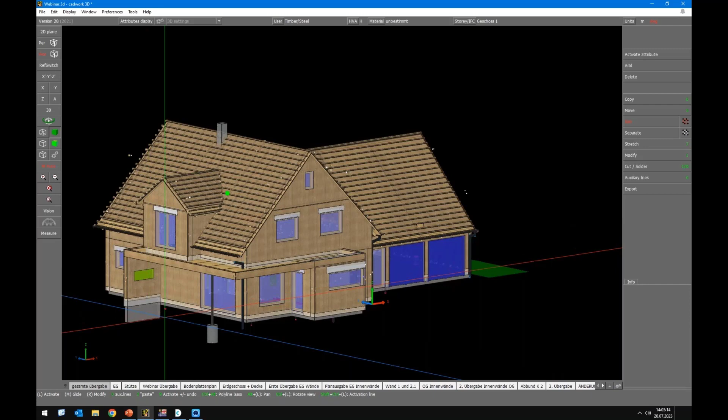To get an overview, I show you the model in cadwork. This is a single family house, let's check the basement here. It's made of timber frame walls, and here we see the floor - the bearing beams and floor beams or ceiling beams. As you can see, the ceiling beams as well as on the real image, they are supported on these bearing beams here, on the down beams, but the architect or building constructor wants to have the bottom edge of the beams on the same level.

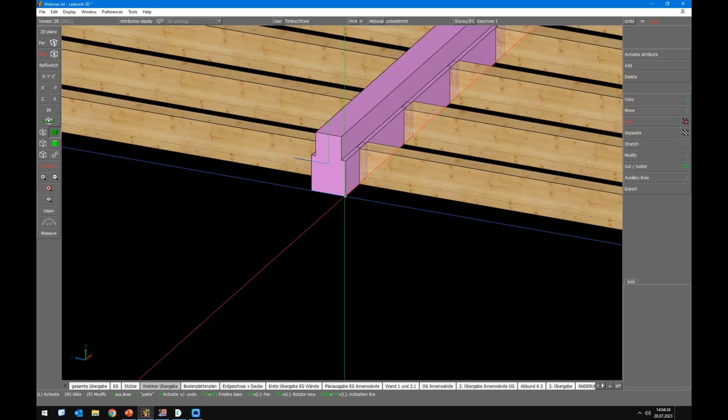So it was decided to lift the beam a bit, you can see it here. The ceiling beams are connected via dovetail connection, and the bearing beam will be a bit inside the ceiling structure. Otherwise, we would get too little stiffness. It was decided to lift this a bit up - maybe not so good for acoustic reasons, but the building constructor decided to have bottom to bottom for floor and bearing beam here, for this downstand beam or flush beam, however you call it.

You can export the file via the IFC interface, for example, or via the DXF interface. We will also be able to export it the old way, what we had in RFEM 5, via the DSTV interface. This will be available soon.

But because of time reasons, I will not show you the import or export today. I start directly with a finished model. If you are interested in the import export via the IFC interface, maybe it's worth watching the German webinar which was done on Tuesday, but because of time I decided to skip this part in the English one. Even when you don't understand the language, you will understand the pictures and how it is done.

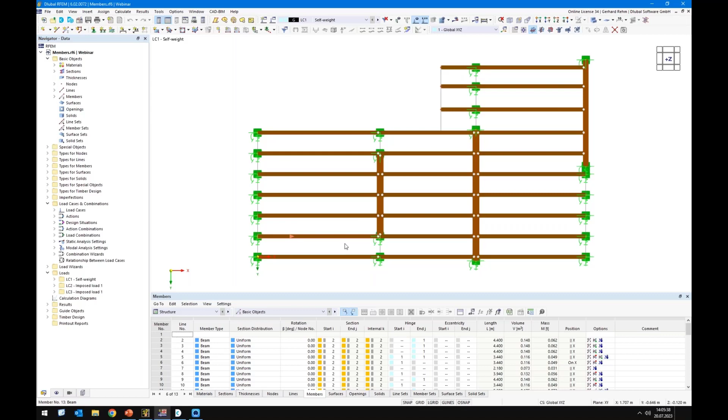So we have imported all members already, and I have assigned the hinges. So we have 3 one-span beams. We have here our bearing beams.

We have here the staircase. So maybe let's go back here. So there's the staircase here. And that's why we have this cantilevers here. And yeah, actually we have everything finished.

I decided to create just one support with a few springs to avoid that the beam rotates around their own axis. So yeah, it keeps it simple.

Okay, so I will switch to the top view. And I have created already 3 load cases. So load case 1, load case 2, load case 3. And we will apply the loads right now.

So there are 2 ways, or actually 3 ways, to apply the loads here on these floor beams or on the ceiling beams. The first one is the manual member load. The second one is the member load from an area load. And this is what I show you today. We will not use it. I will delete it afterwards, but there's a new feature inside and I want to show it to you.

Okay, we apply here 2.5 kilonewton and I will select the geometry by picking these nodes. And we simply click OK.

Maybe let's start with this view. So this is our area load. And when we display it separately, we will see how the loads are distributed to the beams.

Yeah, so let's focus, for example, on this node here. You can see there is this linear distribution and there's this node load. And sometimes it was hard to understand how the distribution works, or from this tributary area, these loads come from.

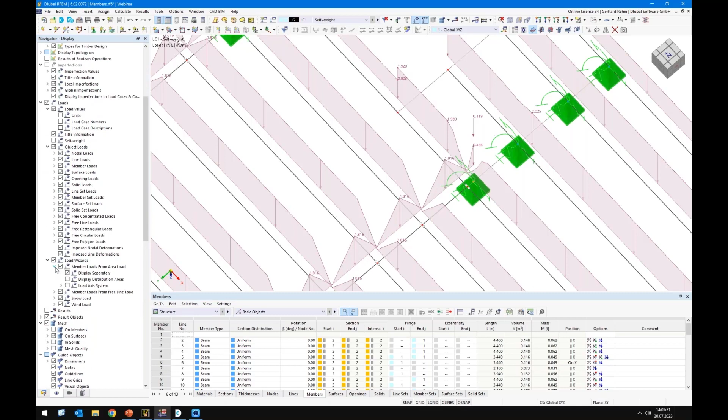And here in the display navigator under load wizard, you will find this option now to display the distribution areas. So when you activate it, I will deactivate the nodal supports here for a better overview.

And when you select the node, you will get these colors here. And now you can perfectly see the tributary area. And you see, okay, perfect. This nodal load or this nodal force comes from this area.

So in the background, or actually you see now these Voronoi cells, which are used here for this approach. Yeah, and this, I guess, is really handy because of a better overview and the understanding of the approach.

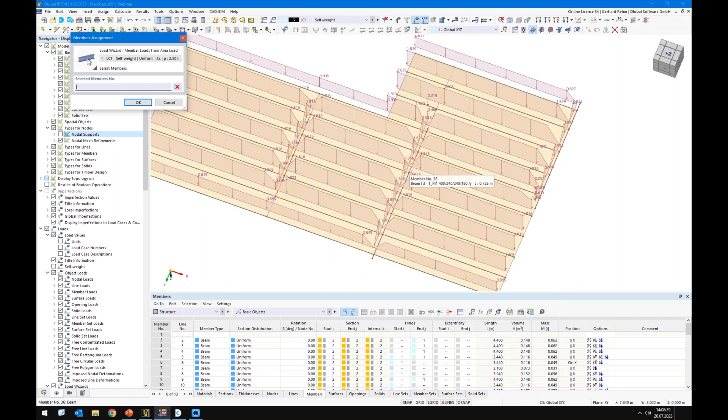Yeah, of course, if I go to the load again and say, please remove all beams which are parallel to the bearing beams, then we get our typical distribution, what I want to use here now. Yeah, and also the Voronoi cells.

Okay, but as I mentioned, we don't want to use it here. That's why I delete it. Because we want to use the surface, the load transfer surface.

Means we will create a new surface by selecting boundary lines. And the stiffness type I will switch over to load transfer. So now I need to select all these lines, these boundary lines.

Okay, let's have a look on the local axis system. Here we go. Reverse local axis system. Yeah, I want to have it downwards. I was a bit confused.

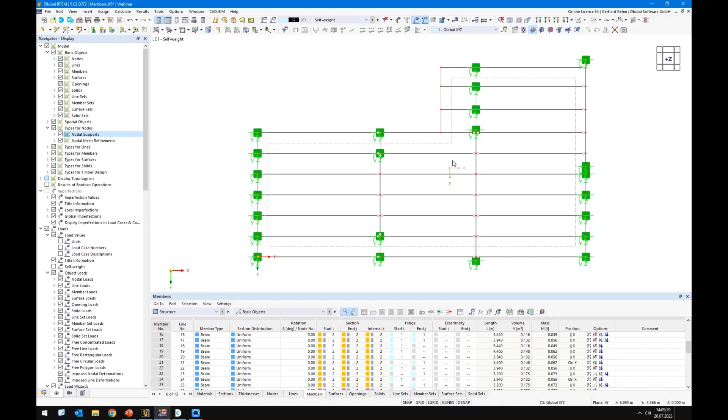Okay, yeah, we see, okay, the local y-axis goes parallel to the global y-axis, means perpendicular to the ceiling beams. And yeah, that's why I will switch over now in the load transfer to Y direction. I want to distribute it via the Y direction to all members.

And as we can see here, we have nodes which will be also loaded. And these nodes are located exactly here on this location and this location, same as we had before in this load wizard.

That's why I don't want to use it. I copied these numbers and insert it directly here. Otherwise, we would get small nodes here, small node loads on these locations, and I want to avoid it.

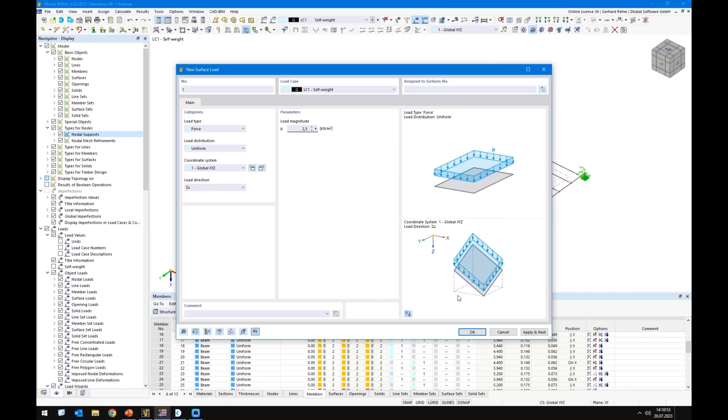Okay, we can switch off again the local axis system. And now let's load it. We will apply a self-weight, additional self-weight of 2.5 kilonewton per square meter. That's from the ceiling structure.

And when we right-click the surface, we can display it also separately, same like for the load wizard. Okay, that's actually exactly what I want to see.

But when we remember there was the staircase here, and on the left and on the right side, of course, we consider only 50% of the load because the surface is only modeled until this location. Of course, I can extend the surface by another 50% of the spacing, but in this case, I show you some other new function called load distribution factor.

I activate these factors, and now I can assign to this member and also to this member, please consider the load by factor 2.

And now when we check it, it's 0.9. When I hit the OK button, it becomes 1.8 again. Okay, that's self-weight. Let's switch over to imposed load.

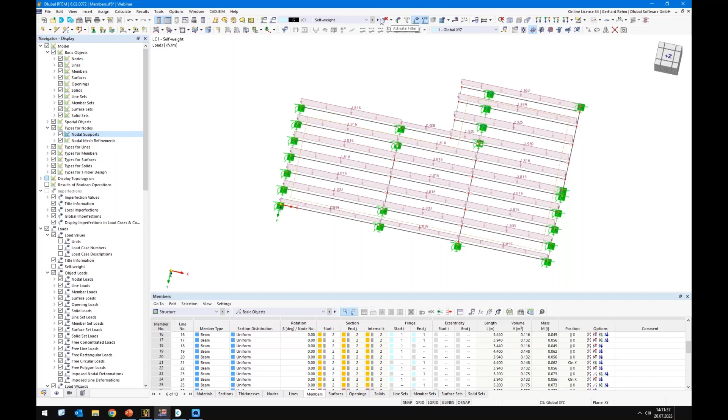Here, I want to consider it per span because afterwards we want to check continuous floor. Here we have 3 times a one-span beam, and afterwards it will be a continuous beam. That's why I directly load it with load case 2 on the first and third span, and load case 3 in this case is for the intermediate span.

In this case I cannot use surface load, of course, because the surface is not divided here on these lines, but I can use free loads, in this case free rectangular loads. So it's for surface 1. I select the area from here to here. I click apply next. Of course, we need a magnitude, in this case 2 kilonewton per square meter.

And again, for the third span, to zoom in a bit, here we go, and click OK. And we will see the distributed loads.

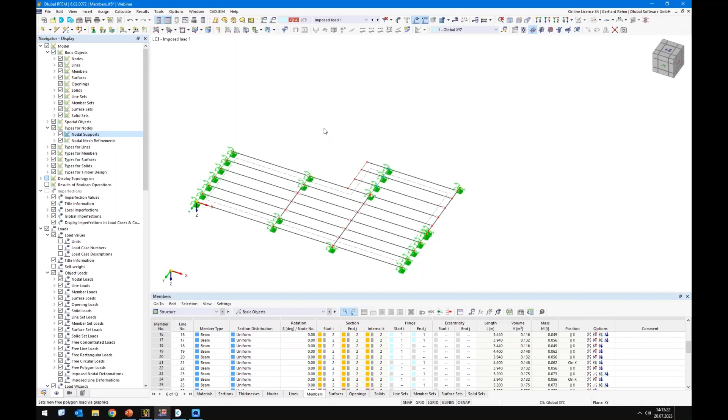Switch over to load case 3, and in this case we have this corner, so we cannot use the rectangle load. We will use the free polygon load. I will select here the corners. Also 2 kilonewton per square meter on surface 1. And that's it.

So before we start designing the floor, we will check, for plausibility reasons, if everything is correct. I run the analysis now only for self-weight 1, and let's check the deformation, moment distributions, and so on.

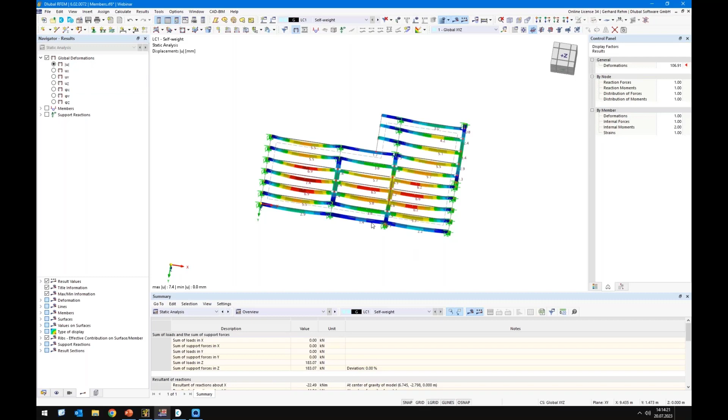I'm not interested in the nodal and support reactions. Let's check the deformations first. Maybe colored, it doesn't matter. So it looks good, and this is exactly what I expect.

Let's switch over to internal forces. We should have no normal forces inside, no shear forces in Y direction, of course in Z direction. That makes sense. And no torsional moments, that's also good. Bending moments look like for every one-span beam, that's okay. Here we have our hogging moment, which is also fine on this cantilever. Looks good so far, and now we can start to think about the design.

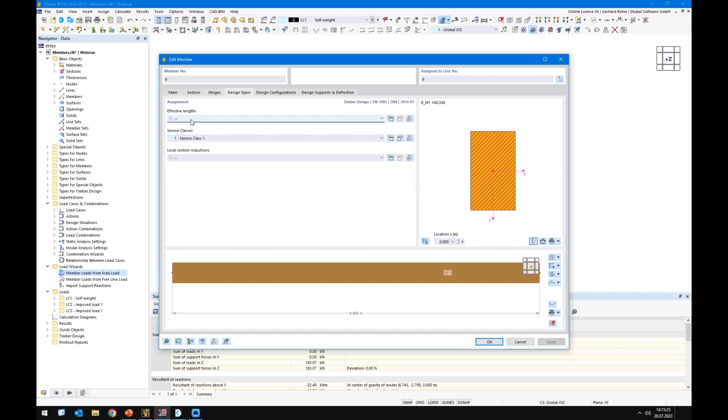Let's check, for example, this floor beam first. So when we come to design, we need to think about stability. Is there any problem with stability? For this floor, of course not. We have no normal forces. We have really non-slender cross sections, so lateral torsional buckling is also not a big deal here.

That's why I go to the ultimate config, which is assigned to all members, and I will switch here to do not perform stability analysis. Then I can get rid of the buckling lengths. For serviceability, it detects the reference lengths like for the member length. In this case, 4.40 m, which is okay.

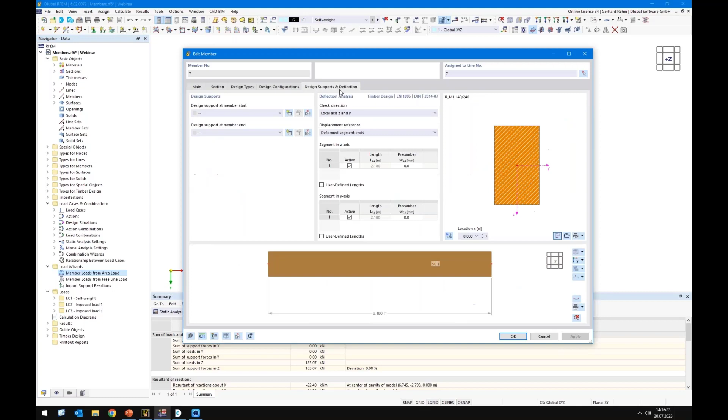So that means I don't have to do anything for the floor beams, but for the downstand beams and also for these beams here and for the cantilever, because right now, if I would design it as a member for this beam here, I would get a reference length of 2.18 m, which of course is not what we want. We should use a reference length for the SLS design of, in this case, 3.44 m.

We do this by combining these two members using a member set. I want to overtake the design properties, so the design properties are not on the member anymore, they are now on the member set. And when we check the design and deflection tab, we will see now we get a reference length of 3.44 m, which is okay.

So we will additionally create member sets for the downstand beams. In this case, I will create 3 member sets, and for this member set and this member set, we will do exactly the same. We activate the design properties. We have a reference length of 2.90 m for one member set and 3.33 m for the other one.

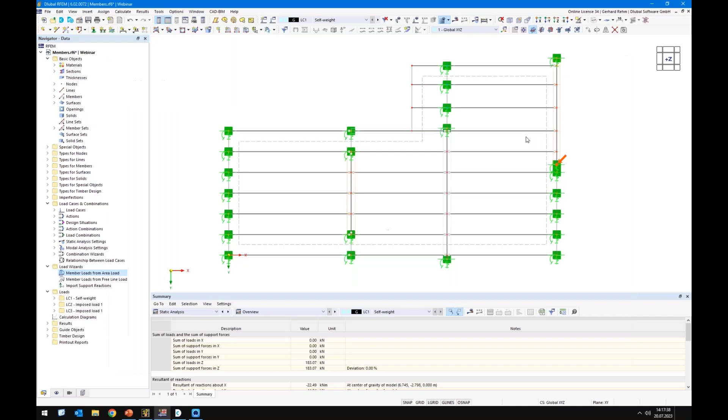Let's have a look at this beam here. Here, of course, we get really high load, and that's why I also add some design supports. So the reference length is still okay for the serviceability check, but I want to check the bearing area. That means I want to check the compression perpendicular to the grain, so that's why we need to create a design support.

So design length is 200 millimeters. And in this case, it's not an inner support, it's an edge support. And the KC90 factor needs to be selected here. In this case, for glulam, I select 1.75.

And that's it actually, but I want to mention these two new options, shear reduction and reinforced elements. So the first one is ignoring the shear force in a distance from the support edge, in a distance of member height from the support edge. That means we will use the relevant shear force for the design.

So this is nothing else than we have really high compression perpendicular to the grain inside. That means it increases our shear strength. And that's why it's okay to use, of course, only when the load comes on from the top side. In this case, I cannot use it because the load comes actually from the bottom side. But if the load comes from the top side, it causes some compression perpendicular inside the beam, and this will help to increase the shear strength.

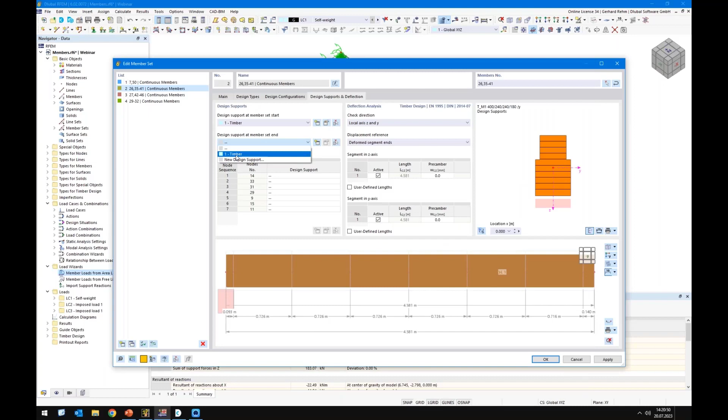Okay, oh, I need to create it, of course. So 200 millimeters and 175, and also at the other side. Okay, that's it.

We need to do the same for the cantilevers here.

So when we check the lengths, the reference lengths, it would be considered with 5.20 meters from member start through member end. Of course, this is not the wished behavior. We want to check this here with a reference length for cantilevers and this for beams.

So in this case, we need to create segments, and segments can be created by using some design supports. In this case, I don't want to check compression perpendicular to the grain. That's why I'll switch from direct support to indirect support, meaning I will switch off the direct support option here.

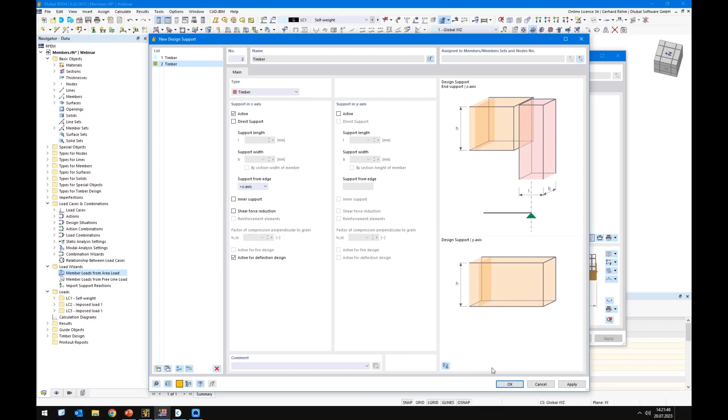Then no design is done for compression perpendicular to the grain, and it detects here this tiny node, and I want to apply it to the intermediate node also, of course, not at member set start or member start.

Yeah, and now we will see when we check, for example, only the z direction, there's one segment for the cantilever with 1.26 and another segment with 3.94 meters. And these reference lengths are used for the design. And since there is no support here, the program automatically detects that this must be a cantilever.

Okay, good. I think so far that's it. We can run the analysis. Oh, yeah, that was the wrong button. I clicked analysis for load case 1 only and not for all.

Oh, maybe it's good to see this, I want to explain something more about the timber design. So we will switch to our timber design. We want to check ULS and SLS. In this case, I guess I have chosen the German annex.

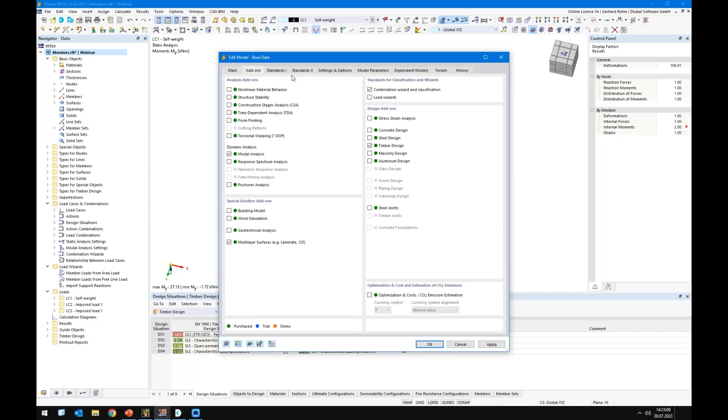I'm not 100% sure now, that's why I check it again. Yeah, it's the German annex, but of course, you can select your annex according to your country.

Okay, so in this case, we check ULS, SLS. We have characteristic, quasi-permanent, and a mixture of characteristic, deformation, and the creep parts of the quasi-permanent one.

Objects to design: okay, all member sets and all members, but you see we will get some invalid members. When we select it, we will directly see the invalid members are members without design properties, because the design property is here in the member set.

So to get rid of any warning message at the end of the calculation, I insert here only the list of all members, here of all member sets, and of course the surface, which is a load transfer surface, cannot be designed. That's why I switched it off here as well.

Materials, okay, it was taken over here, GL24 for the glulam beams and C24 for the ceiling beams. Okay, when we go to sections, we should think about the sections here.

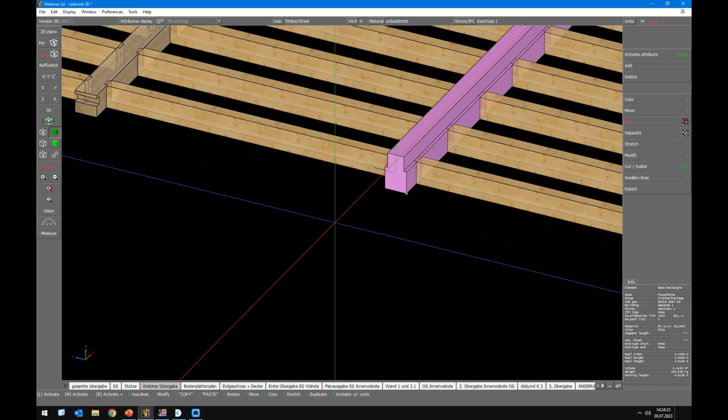Here, this is this inverse T-beam. And when we check it in the model, I create a visibility. I also use this inverse T-beam here. But when we think about the connection, we have these notches here coming from the dovetails.

In this case, it's better to not consider it for the ULS design. For SLS, it's not a big deal because it is reducing the stiffness, but it's not worth talking about because the influence is so small. But for ULS, of course, the influence is big.

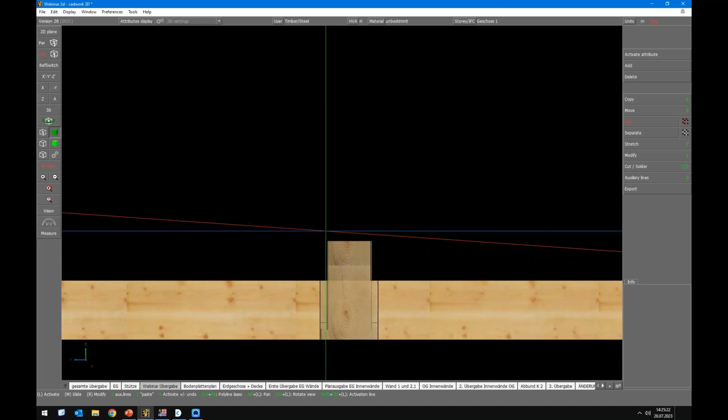And in this case, we need to reduce it, and that's why I will directly use here a rectangle section, which is 180 by 400. This is from here, from this to this edge.

And this we can directly use here by using the option 'use other section for design'. So for the left side, it was this one, 24 by 24. And this one is, I guess, 180 millimeter on the top side. Yeah, 180. Okay, so we click here and then we will replace the 240, the width, with 180.

And here I will also use 180 by 400. Okay, and now we have considered the notches as well, and we can be sure that the ULS check is correct.

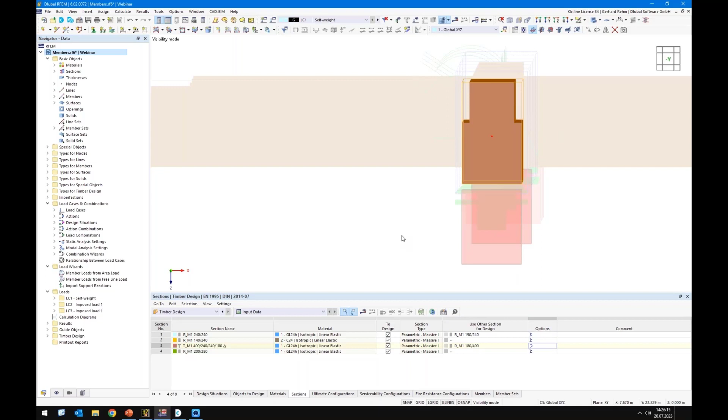Okay, then let's start the ULS check and the SLS check, of course.

Okay, we get the results for our load combinations. Let's cancel the view, and...

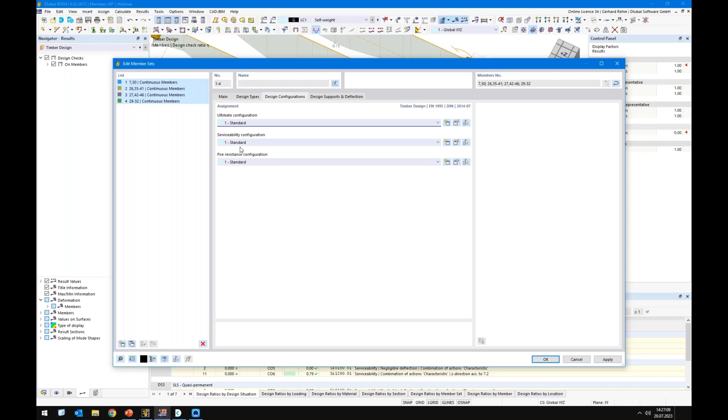Now we see, oh, maybe I forgot something. Wait a minute, please. I forgot to assign a config to the member sets. Of course, member sets should have also a ULS config. Otherwise, only a serviceability design check is done, and this is what we don't want to do.

All right, so sorry, I need to run the timber analysis again. Of course, not the internal forces, but the timber analysis.

Okay, and we see here our ratio graphically. We see here on the bottom in the table directly, okay, there is one beam which causes some problems.

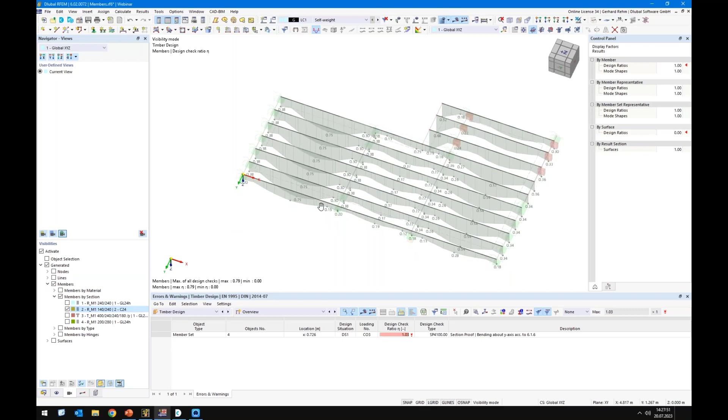Maybe let's start with the ceiling beams. Okay, so we will get the maximum ratio, let's focus on this span here, of 75%. We can check it here separately for ULS, which is around 60% ratio, and for SLS, it's around 75%.

Okay, that's what I expect. When you see the ratio here, the ratio is affine to the deformation, especially here on the cantilever, you see directly the ratio affine to the deformation. So we can confirm that everything is defined correctly.

All right, maybe let's go to the next object. In this case, let's check this T-beam here in -x direction. Okay, and what we see here is a ratio with some jumps.

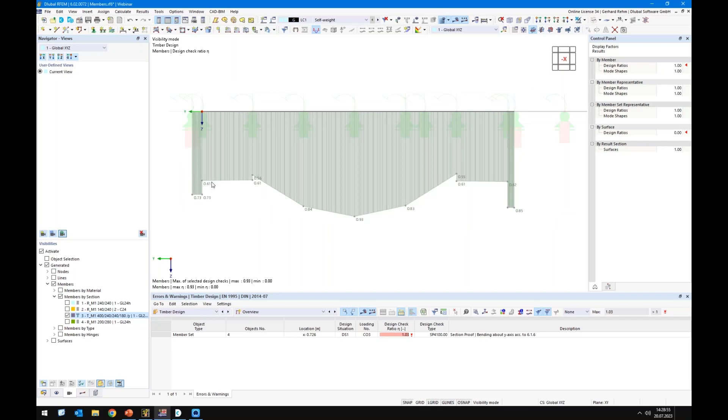Yeah, of course, the first part from here to here, shear is governing, and from this point to this point, deformation or bending, and here shear again. But if I'm interested in more detail, I can also switch off here SLS and all checks.

And I can check it separately. So for example, I want to check only bending, and I get the ratio only for bending, or only for shear, it's affine to the shear force distribution. So I also get the ratio at only one X location because of the support bearing resistance.

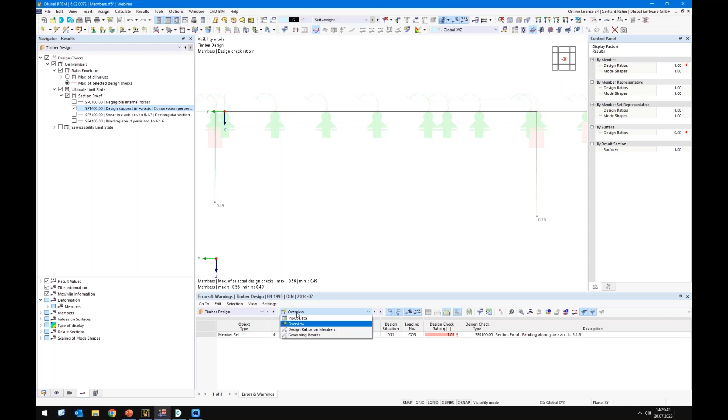So when we switch to the input, and we switch to the design ratio on members, we can see, okay, we have compression perpendicular to the grain.

Maybe let's open this design check. And here you can see what is done. You see the whole equation, the whole stuff from the code. We have our support length of 200 millimeter extended by another 30 millimeters. So you can follow every value in detail, or every intermediate value, which helps you to prove your calculation.

Okay, additionally, if you are interested, maybe we can do it in the ULS.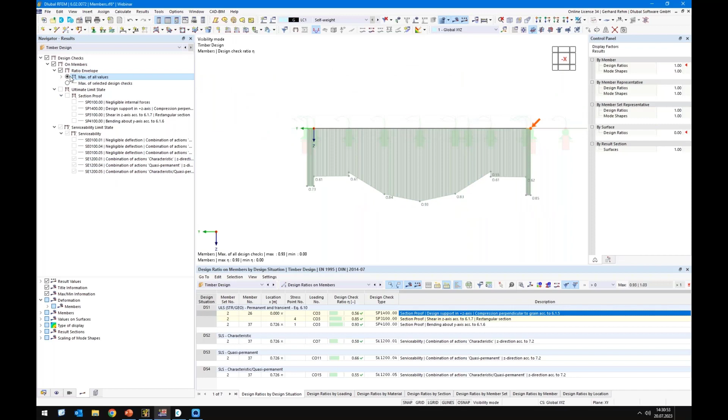You have the option to deactivate the ratio envelope, and then you will get 3 different ratios overlapping each other. The first one is design 1200/01, 04, 05, and here you can see which ratio it is from which combination. Okay, let's activate again the max of all design checks, so the envelope.

We can see here we have a small issue because of bending, but especially on this location, we know it's a small glulam beam with 240 by 240. And when we know that the reference strength of the EN 14080, the glulam standard, is giving us the strength for a reference height of 600 millimeters, so we are far away. That means we can use our KH factor, our size factor, which can be considered here in the ULS config.

Here you can activate this KH factor according to Eurocode 5, chapter 3.3. And now we can increase the strength up to 10%, so 24 by 1.1 in this case, because the beam is so small.

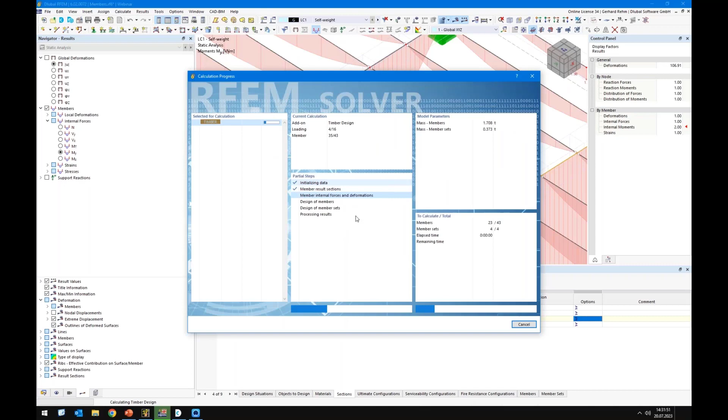Okay, now we get a ratio of only 94%, which comes from bending. Let's have a look inside. Okay, and we will see here, this is the KH factor, and 1.1 by 24 equals 26.4. So actually we have proved the floor, so it's okay according to ULS and deformation.

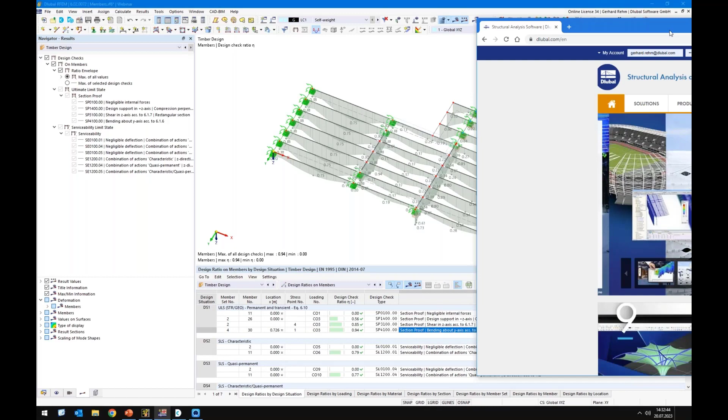Of course, for floors we need to check vibration. That's a big topic, maybe leading or controlling. So for this floor, maybe when we have time at the end, I will show you the vibration design check. If we don't have time, I will refer to our website.

And here on the website, under Support and Learning, you will find videos. Here, videos, you can search for vibration. And when you scroll down, you see this video here, and here I show you in detail how you can proceed with the vibration check.

So maybe let's see what about the time at the end, and then maybe I can show you something as well. If not, I refer to this video.

Okay, let's say vibration design is fulfilled, and we call the carpenter, for example, and give them the cross sections. On the next day, they call again. Okay, the architect or the building contractor called us, and they want to have maybe not a wooden beam ceiling, maybe they want to have a glulam ceiling, or they want to have a cross-laminated timber ceiling. That means for us, okay, we have to redo the whole stuff, but of course we want to spend as little time as possible. And how can we proceed in this case?

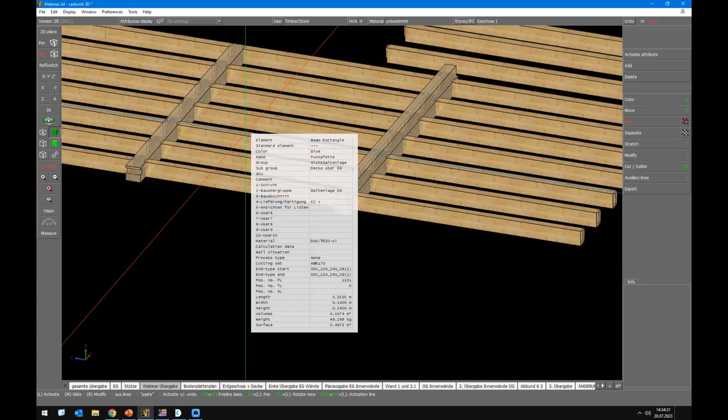So let's think about glulam floors or cross-laminated timber floors. Of course, it would be too uneconomic in this case using one-span beams here. So that means in this case we have to use real downstand beams, which are underneath the beams. In this case we need to think about the cross-section height, especially since we don't have so much height in the floor. So when we have at least, let's say 2.50 meters, and the downstand beam already has 400, then only 2.10 meters are left, and of course this is less. So in this case we need to keep the downstand beams as small as possible.

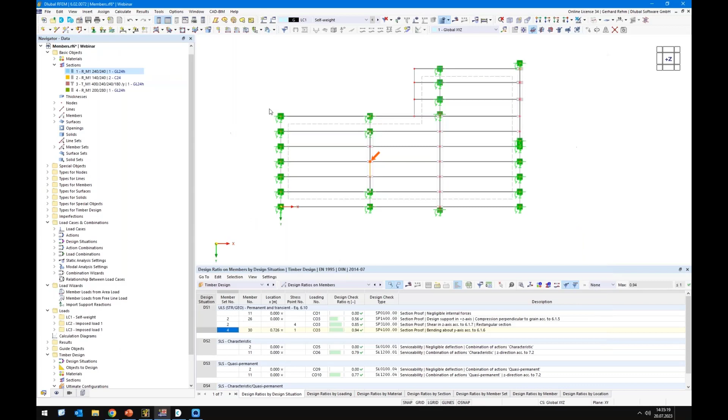So in this case, I want to replace these beams here by, in this case, also timber beams. Of course, you can use steel I-beams as well, that's also possible, but I replace my sections here. Let's start with the left one, 24 by 24. Or let's start with the right one. And here I want to replace it, let's say, by 200 by 360.

And now we come to also a relatively new feature, about LVL design. So now we are able to design also LVL materials. I guess the most famous producers are listed here: Pollmeier with Baubuche, Kerto, Steico, Stora Enso.

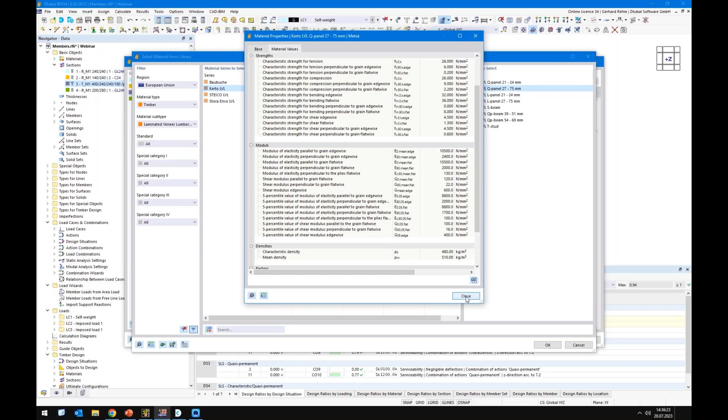And the advantage is it's not only for beams, it's also prepared for surface design. So we can select Kerto Q-panel, because all values are available for this material. You can see all values for stiffness and also for the strengths are available, and we can do a full design. In this case, we select the Baubuche GL75 beam and we click OK.

And now we have to think about, okay, what about the lamellas? Are the lamellas orientated flatwise or edgewise now? So let's go back to the material again. And here we see we use an isotropic linear elastic material model. In this case, we use a flatwise orientation of the lamellas.

This is flatwise. Of course, if we want to use it edgewise, we can flip the member by 90 degrees. This would be an option.

But much better now, we have new material models in RFEM 6 called isotropic timber or orthotropic timber. When we select isotropic timber and switch to the next tab, we can switch between parallel and perpendicular, flatwise and edgewise. For Baubuche, there's not much big difference, only the shear modulus will change when I switch to edgewise. But when we think about OSB materials, for example, they have different stiffness in different directions.

That's actually why this material model was made for. In the past, with RFEM5, we had to decide if the material is wall stressed or plate stressed. Now we can have everything within one material model. Here you can see we have wall stress E-moduluses in both directions and plate stress E-modulus in both directions. The glulam beam or Baubuche GL75 beam can be used only as a beam, we cannot use it in perpendicular direction, that's why we have 0 values here.

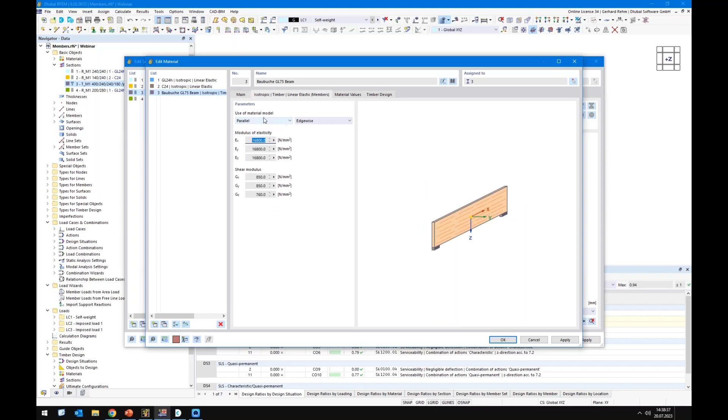Let's switch this back to isotropic timber, in this case parallel and flatwise. We will do the same for cross section number 1, and switch over the material to Baubuche.

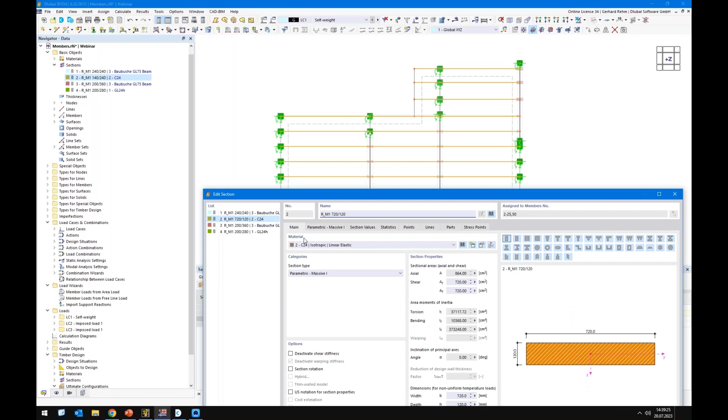The floor beams, of course, need to be changed as well. For a glulam ceiling, normally we have elements like 60 or 62 centimeters. In this case, the distance is around 72 centimeters. So for simplification, I switch the beam width to 720 millimeters and the height to 120 millimeters, and switch to GL24. Don't worry about the orientation of the lamellas here, this is just a graphical issue.

When we switch on the rendering, we see the width fits nearly perfectly here, maybe not here. The load transfer surface is visible as well, but it's a small error, not relevant to mention.

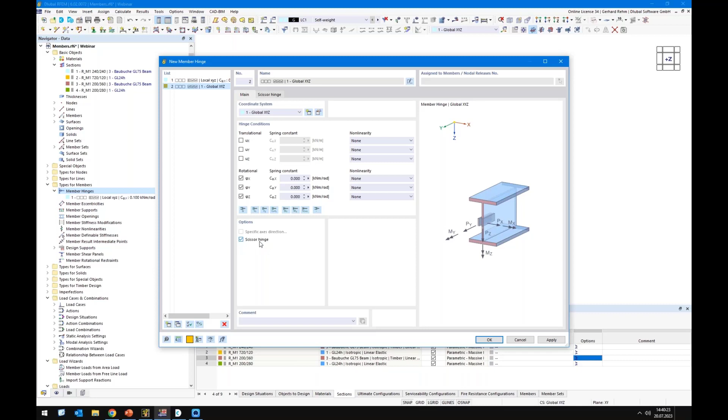The continuous effect is a topic, so in this case we will create a new member end hinge, a so-called scissor hinge for all degrees of freedom, or for all rotational degrees of freedom. This scissor option causes the effect that no moments are transferred to our downstand beams.

Now I select the option assign to members graphically, and select it on the right side, here on the left side, and this one, and on the right side. We select OK, and now we have assigned this member hinge to the continuous members.

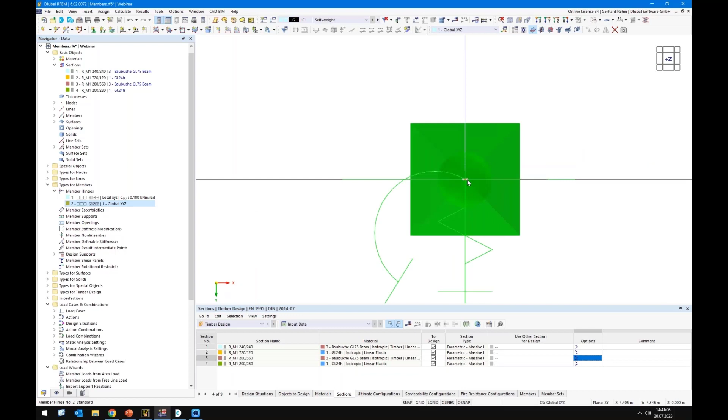Here we have no additional member, we don't need it. Wait, yeah, we can delete it because it's a continuous beam. I will switch off the nodal supports and select the hinge and delete it manually.

Also here on the bottom we don't need hinges. No, I don't want to select the member, the hinge. And here it seems I have forgotten the hinge on member start.

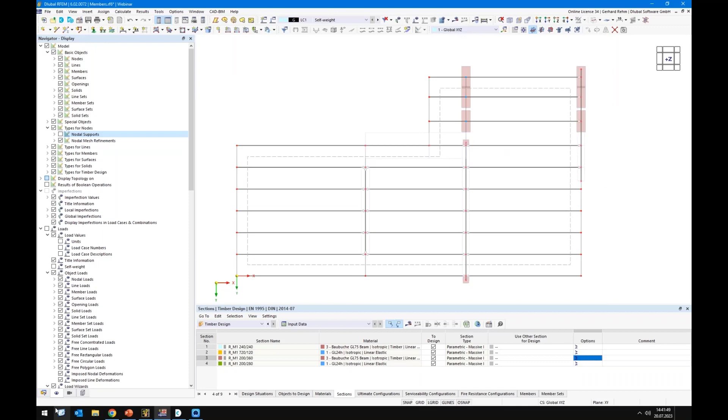Looks good, looks good. Let's double check it again, checking all the yellow colors. Okay, looks good so far, so that's it actually, we have to find everything.

So we can run the calculation again. That's the easiest way to switch from a floor beam, actually from a wooden beam ceiling, to a glulam ceiling.

Of course we need to recalculate the internal forces, and then we design the members. So let's check, in this case, the cantilever, because of the high load here, will be deformed upwards, and that's why we get this ratio.

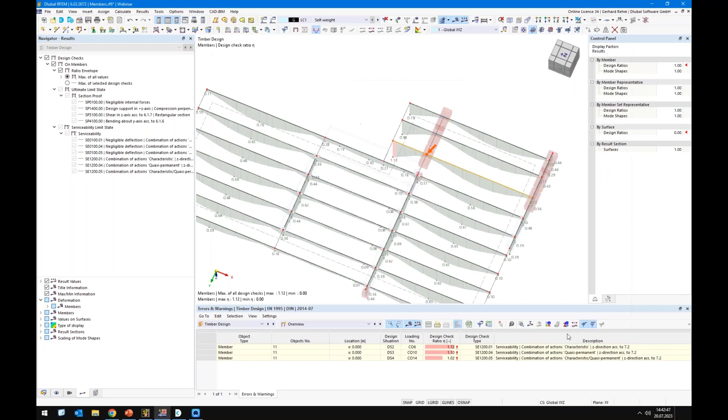In this case, I'm not interested in this ratio. You can deactivate the design check here by setting this checkbox to inactive. All right, but we don't care about that, let's check.

We have, for the glulam, a ULS check of around 36% ratio, and for SLS we have around 70%, 68, 69%.

Let's check also our glulam beams, or our Baubuche beams, sorry, it was section number 1 and 3. So we have ratio for SLS of 69 and 62, and ULS, yeah, extremely small.

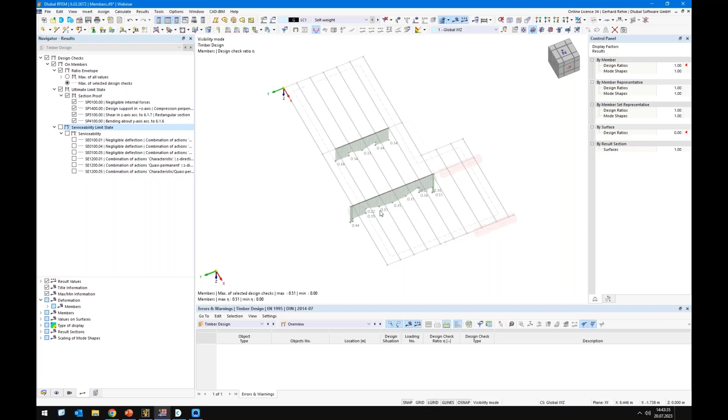So maybe worth changing it to 320 millimeters. Now we have 200 by 360. Then we can change it to 320, but that's okay for now. Okay, so we remember the ratio.

It was around 38 for ULS and 68 for SLS. Okay, but of course, in case you come from scratch, you don't want to model this maybe as a girder. Maybe you want to model it directly with surfaces, and this is also possible.

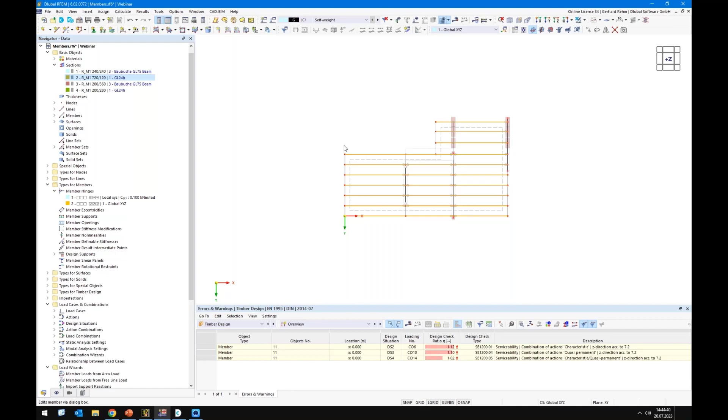In this case, we will select our members, our floor members, or maybe we can only hit this button and right click the member, because we don't need it, because I want to consider now the stiffness via a surface. So that's why I go to edit, and I will switch the beam type now to result beam.

So this result beam will not bring us additional stiffness. It considers only, or actually the result beam is just integrating the results from the surface. Not only the internal forces, but also the deformation. So I create a result beam really small with a small integration area of 1 millimeter, because to have the deformation that's clear, I need a width, to get something integrated. Okay, that's all.

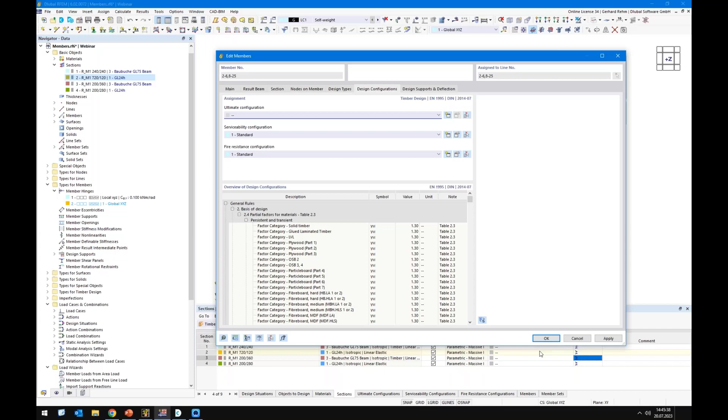All right, then we should focus on that these beams should not have any ULS config, because we don't want to check it against ULS. We want to check it against SLS in this case, because the ULS check will be done by the surface. And the reason why I did this, I will explain in a few seconds.

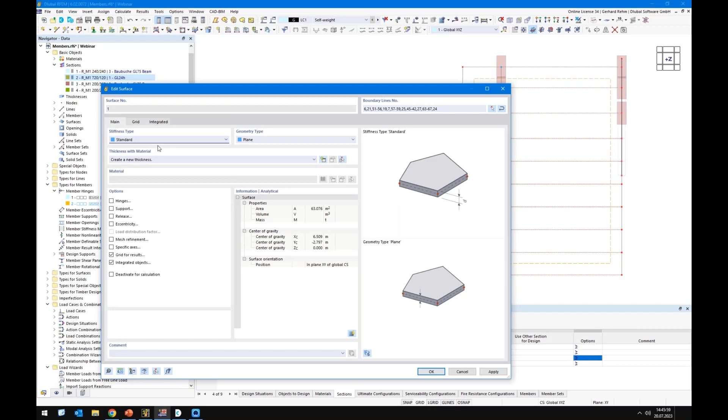And for the surface, I will switch this to standard. And here we create a new thickness. This thickness will be 120 millimeters. And the material is GL24, that's correct, but an isotropic material model, which we cannot use for timber, for surfaces and solids. So we create a new one.

So I will copy this material number 1, and now I will switch to orthotropic linear elastic, but I can also switch to orthotropic timber. So in case of glulam and softwood, it does not matter which one you use, because it's the same. So when we switch to orthotropic, you will see we will get the same E modulus for plate and wall stress. So that's why we can also use this one here.

Okay, we see here we have the E modulus in X direction and in Y direction, which is EX divided by 30. Okay, it should be material 4. Okay, good.

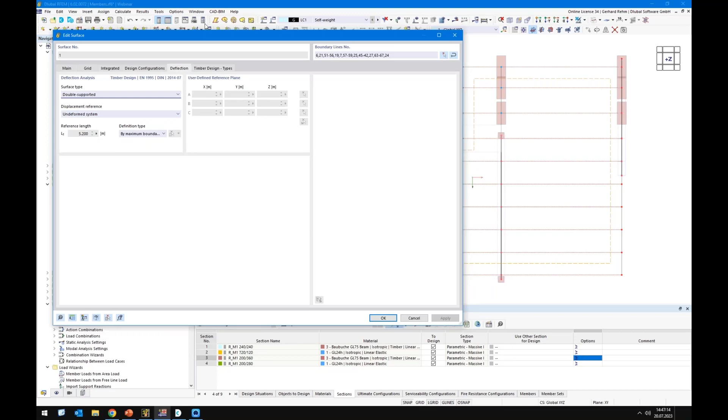Okay, so now we come to deflection, and that was the reason why I left the beams and converted them to result beams, because here we need to define reference lengths. And since I have defined only one surface, it's hard, because what is the reference length? And I want to consider the deformed system and not the undeformed system.

So to make it more clear, I will create this small sketch. So when this is our floor, and let's say this is our deformation. This is the downstand beam 1, downstand beam 2, and this is the edge.

Okay, so what we want to check is the deformation related to the shifted FE nodes. And this is, of course, hard for the program to determine. I mean, we have options here for undeformed system, which I don't want to use. I want to use the deformed system.

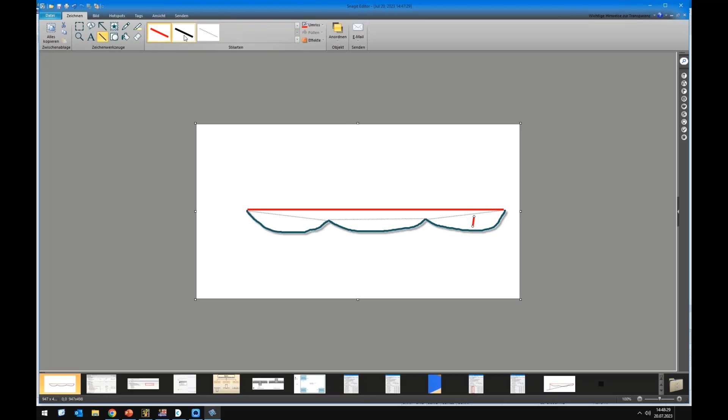We can define a reference plane according to the maximum or minimum point, or a user-defined one. So when we think about if I want to check the deformation here, and I define a user-defined plane, for example, like this, you can imagine what happens to the deformation here. They will be absolutely wrong.

Sorry, till here. So that's why it's better in this case to use these downstand beams. In case of rigid supports, it's not a big deal, there's no difference. But in case of semi-rigid supports, it's better to prove it with result beams. Okay, that is why I switch on the config here, and I will switch off serviceability here.

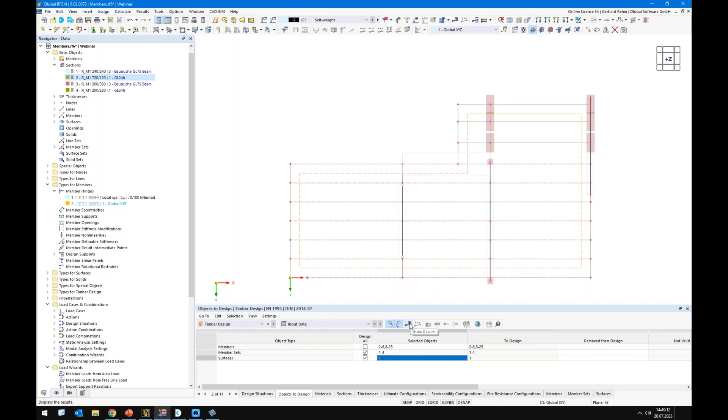Of course, they don't transfer moments in Y direction, so perpendicular to the grain. And of course we have a small E modulus here. So when we check the material again, this was this E modulus, 300. So there are a few options now. We can either create a user-defined material and override it by maybe 1 Newton per square millimeter, to have no stiffness in Y direction.

That is one option. Of course, the second option would be to create multiple surfaces for each beam, which is really time consuming, and the benefit is actually less, or there is no benefit.

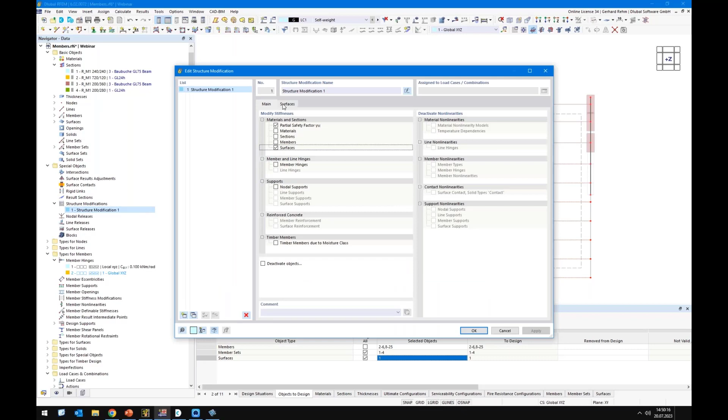The third option would be to modify the stiffness matrix for the surface. So when we check special objects, structure modification, we can create a new one, where we reduce the stiffness matrix element D22, which is the stiffness in y direction, and the torsional stiffness, setting it to a factor of 0.001, for example. But it's so small that I'll skip it and not consider it in this case.

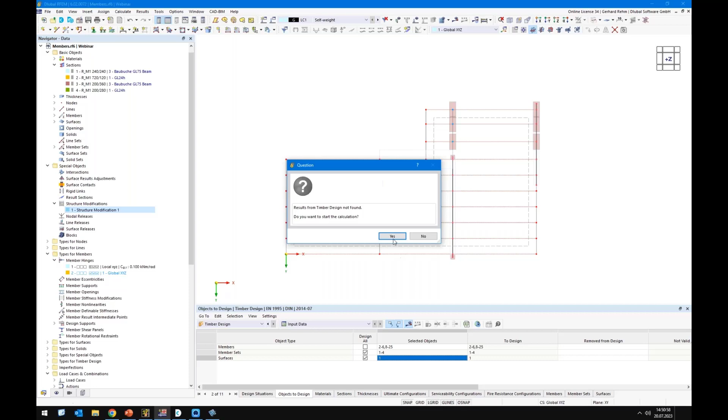Okay, maybe worth saving the file. And now we can run the analysis. So in this case, we get member results for ULS, for SLS, and we get the ULS design for the surface. Of course, we need to recalculate all internal forces again, and afterwards we will do the timber design.

Okay, we can go on with features which will be released in the near future.

So the first important one is the fire resistance design for initially protected and unprotected surfaces. There was always this problem that it was available for members but not for surfaces, and we are close to finishing this feature, so we can offer fire design also for surfaces.

Cross-laminated timber. Just need to click the yes button to recover the file.

Oh, not okay. Let's check if everything is available. Oh. Fortunately, I saved the file. Where is it? Members, okay.

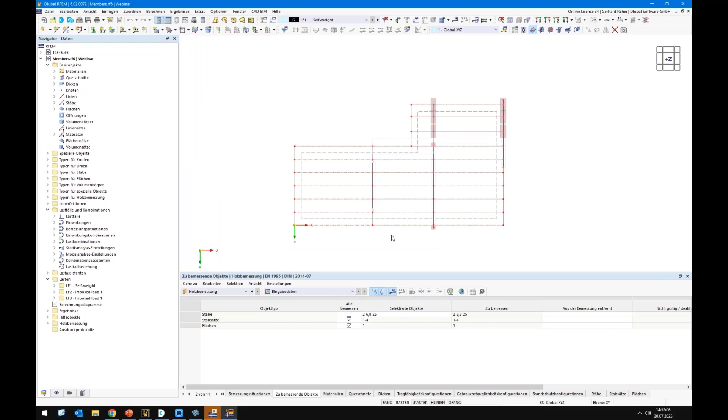Okay, let's run the analysis again. Hopefully it works now. I have no idea what's going on, but it's working okay. Good.

Okay, my first mistake was not checking the mesh size. In this case, the default value of 0.5 meter is used. Maybe better to adjust it to 0.25 meters. Okay, let's run the analysis again.

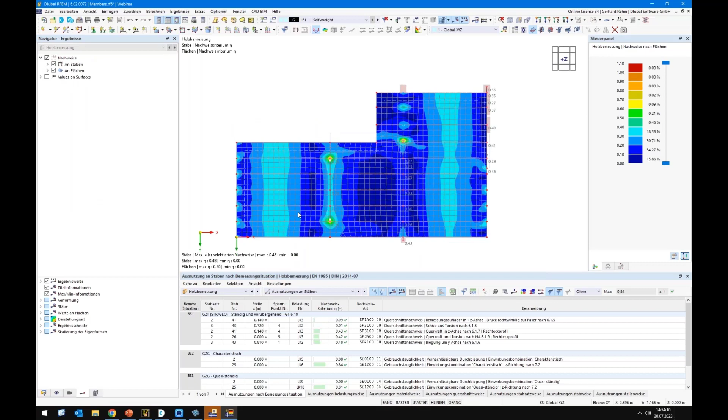Okay, so maybe focus first on the member design. Of course, we will see the ratio of the downstand beams, but we don't care about the downstand beams now. We are interested in...

Oh, sorry, it's in German. Oh my God, sorry, it's in the German interface now. Oh, I started the wrong version. Ah, come on. Sorry. Sorry. I need to open the English interface, of course. My bad.

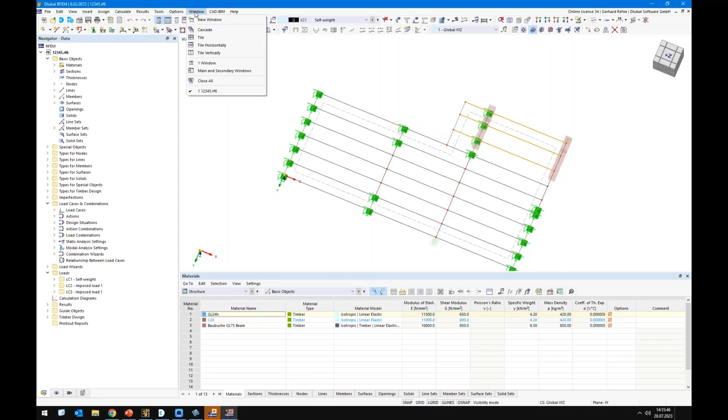Okay, this is the wrong file. I need to open. Members, here we go. So now we lost a few minutes. I'm sorry for that.

Okay, so we have to change the mesh size to 0.25. Okay, now let's rerun the analysis again.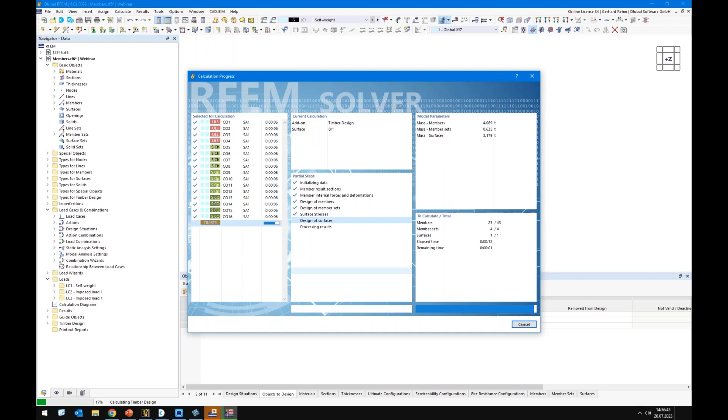Okay, so switch on the surface results again, and we will switch over to the SLS ratio. Okay, we'll switch the image off. So using the surface results, now we have integrated the results from the surface to this result beam, and we have designed this result beam according to SLS, and the ratio is the same as for the member design.

Yeah, so this is what I want to show you. And when we switch on the results for the surface, we hopefully get similar results. So the ratio here was around 38%. We have nearly the same here on this hogging bending moment, which is controlling in this case.

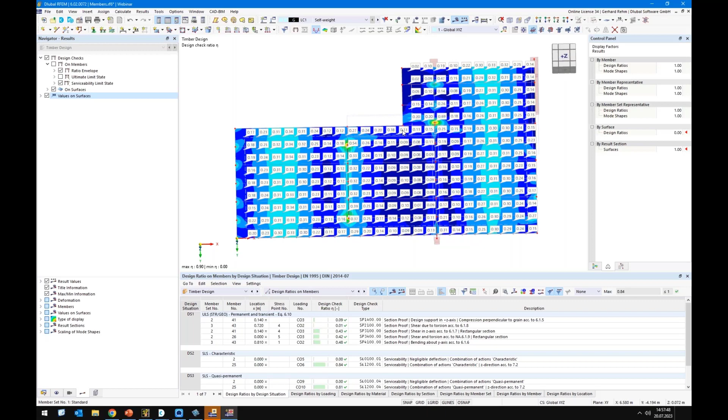So it is up to you if you prefer using members, or better to try directly a surface. Additionally, we can design cross-laminated timber here as well. So in this case, we need to create a new thickness as well.

Or maybe it would be nice to support lines too, because you see here the singularities, since I have not replaced the nodal supports by the line supports. That's why we get the singularity. So it's better to use line supports in this case. But for now, it's good.

We lost already a lot of time because of this issue.

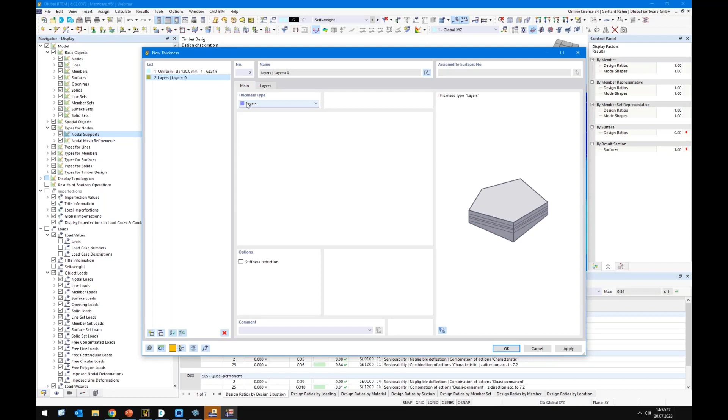Okay, so when you want to design a cross-laminated timber, we create a new thickness in this case, and we will switch to layers here. This is only available if the layer add-on is activated in the base data. And here we can directly select our composition, for example from Binderholz, a 5-layered 120 millimeter.

Then we can compare the ratio from the glulam to the cross-laminated timber. Okay, I mean, this is maybe not... well, maybe we can run the analysis. It doesn't matter, so we have replaced it.

We can check the orientations again for this surface in X and Y direction. So layer 1, 3, and 5 go in this direction, and layer 2 and 4 in this direction. So it's okay. Here it's the same because of the bending moment, of course the elements are larger.

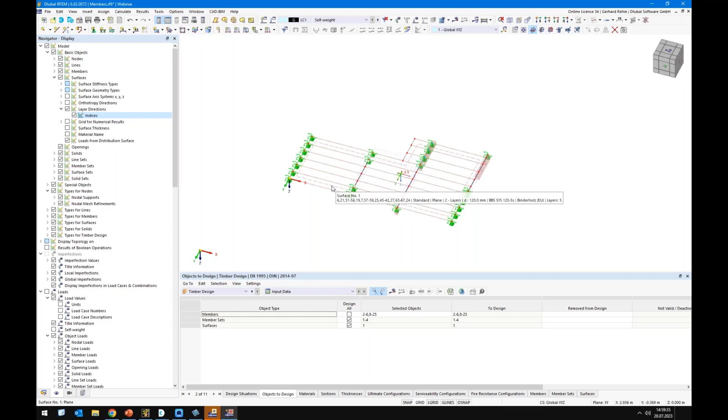Maybe it's worth it to model the surface, to split the model at every 125 centimeters in this case, and add a line hinge in between. But for simplification, I leave this for now.

And we can also compare the result here. But of course we have to be aware of singularities because of these nodal supports, which will be more of interest for the CLT design compared to the glulam design.

Of course the design takes a bit longer than the normal surface because we have much more results. We have 5 layers, we have results on top, bottom, and on the intermediate side. That's why it takes a bit longer.

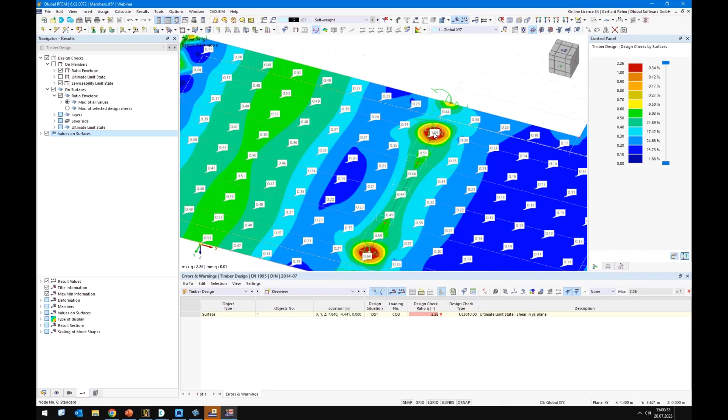Okay, so let's check the values on surfaces also for the envelope. And here the ratio is, we have here a problem. I'm sure this is because of the rolling shear and this singularity. This needs to be analyzed a bit more in detail. We have no time for that today, but in general it looks okay with 50% ratio for ULS, and for SLS we have around 85 to 90%, which is also okay.

Okay, that's actually about this design of the floor.

And I told you we will come to this load transfer to the other model. We reached the next step in this development. So I want to show you how to transfer the load from this nodal support and this nodal support to the columns. As we see here, of course the beams are supported by some columns.

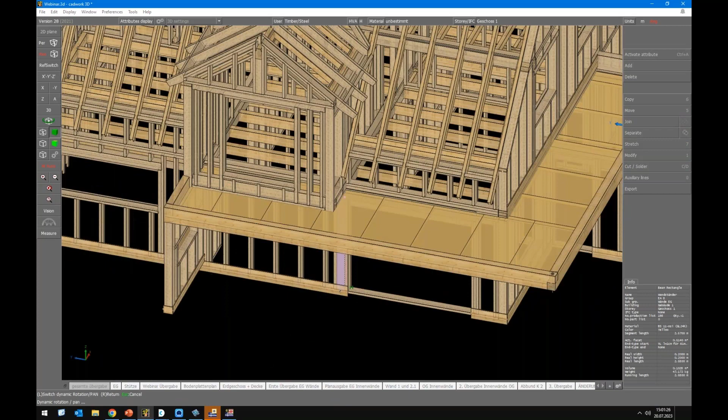And also here we have some installations which need to be considered maybe, and this needs to be checked.

In this case I have prepared already a model with 2 columns, and now we want to design these columns by overtaking the support reactions from the first file.

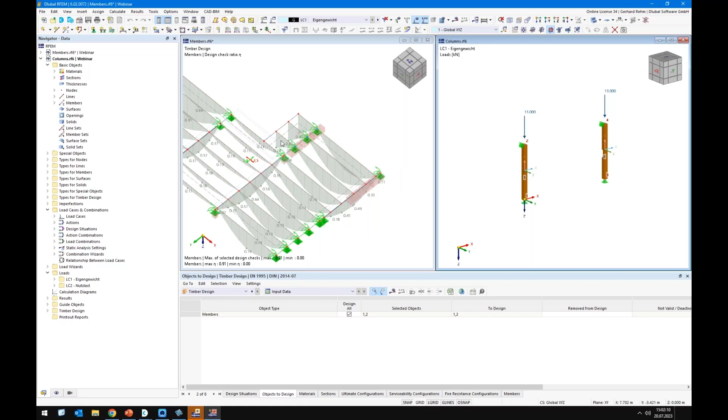Okay, we have here the 2 columns, and these 2 columns have some loads already from the first story, and now we want to add the loads from these nodes here. We need to switch on the numbering in this case, nodes with support and numbering. So it's numbering 52 and 51, and we want to apply load from 52 to node 2 and from 51 to node number 4. And here we can use the new object called import support reactions.

So here we see this model members, which is also connected. I'm not sure if I saved it, hopefully I saved it. Let's see. Members.

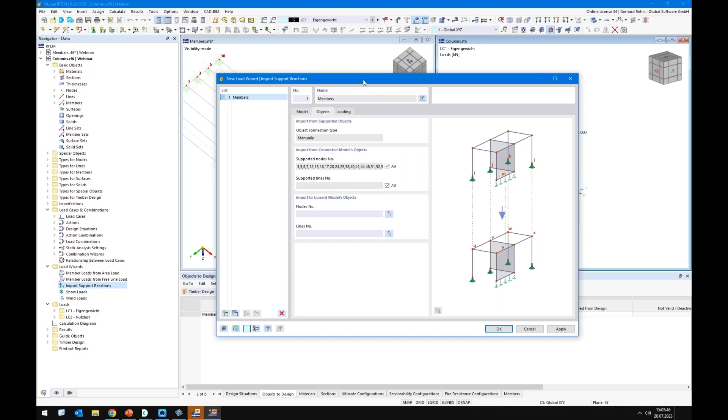And here we come to the next tab, objects. So the first option is manually, that means we have to overtake the values manually or connect the values manually. There will be a new option, automatically, in the future where it detects automatically the nodes based on the location. In this case I have modeled it independently of the location, so therefore I have to connect it manually either way.

Okay, so we deactivate here all nodes and we add node number 52 and 51. And here we want to have 2 and 4.

Loading, we can overtake the loads from multiple load cases. So we have here 2 load cases, meaning we actually have 3 load cases. And we will add this load from load case 3 also to load case 2. So we see we can select the direction, only forces in Z direction or Y or X, and also the rotational degrees of freedom can be overtaken.

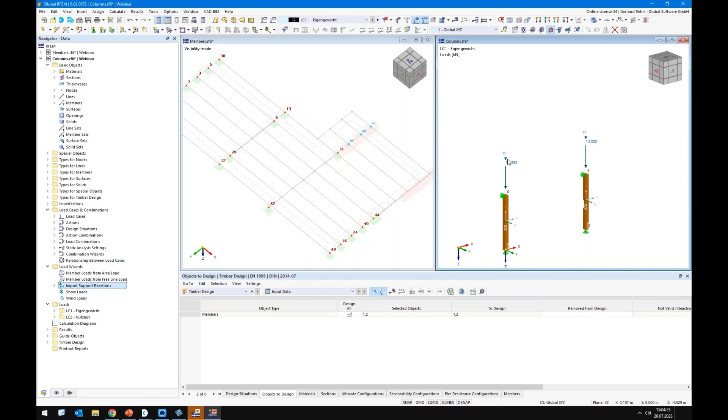Okay, I click the OK button and I will see here, okay, there's a question mark because this file needs to look inside this file, but this happens only in case when you calculate the file.

Okay, that means I will click the Calculate All button. Now it searches for loads or support reactions inside the original file, and it will realize there is no result available. It will calculate automatically the load cases and load combinations.

And when this is done, we will see here the value will change from a question mark to a real value. And now it starts to calculate the column model. I have set only 2 load cases and only ULS in this case.

Okay, so this load has the activated option imported support reaction, so we cannot change it. And we can check load case 2, and here we have the 2 load cases. Yeah, this is how it works to import the support reactions from another file.

What happens now when we, for example, add another load to the original model? So I will apply another load here, and you see here the loads are still available.

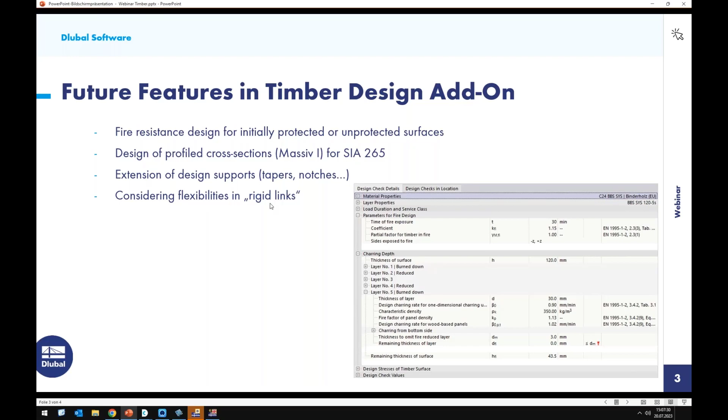So we will consider slip, or actually line hinges in the rigid links, in the future. It's not directly based on the Timber add-on, but of course in Timber design we consider a lot of stuff that's not rigid but semi-rigid, and in the future this will be available.